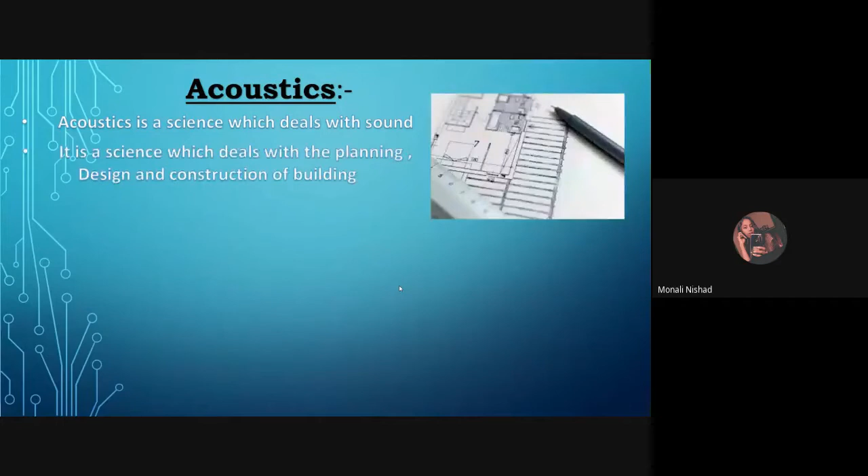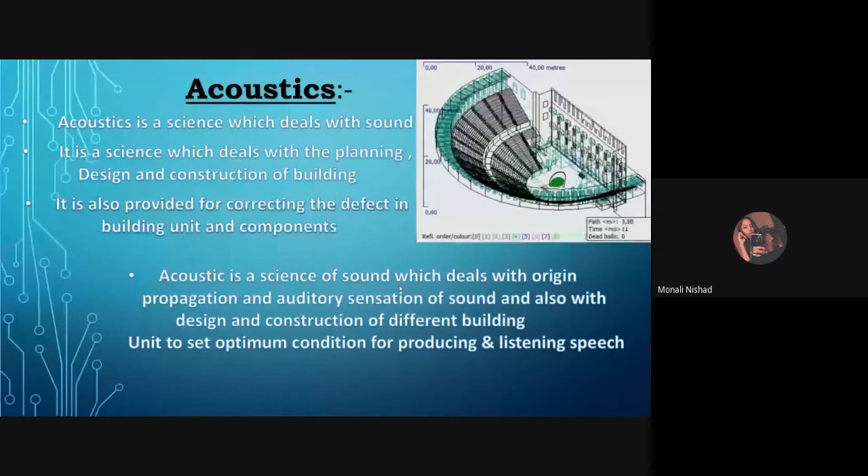To deal with these types of problems, we have a branch of science named acoustics. Acoustic is a science which deals with sound. It is a science which deals with the planning, design, and construction of buildings. It is also provided for correcting the defects in buildings, units, and components. Acoustic is a science of sound which deals with origin, propagation, and auditory sensation of sound, and also with design and construction of different buildings, to set optimum conditions for producing and listening to speech.

Now, we are going to discuss some basic requirements for an acoustically good hall. Just imagine you are attending a music concert inside a hall and at the same time aircrafts creating loud noise are passing outside. Then what do you think, could you really enjoy the music? No, I don't think so.

So our first requirement is site selection. Before construction, the first important factor to be considered is the location for best acoustical quality of the hall. It should be far from railway tracks, industrial areas, airports, and highways, so that the heavy noise of such locations could not affect our event. Through an appropriate orientation, layout, and structural design, the background noise level in the hall should be kept at around 40 to 45 decibels. Now I would like to invite Nishant to explain the next point.

Thank you, Monali. Hi guys, this is Nishant. Now I will explain the topic volume required for an acoustically good hall or auditorium. The volume of the auditorium is decided by the type of program to be conducted there, and also the number of seats to be accommodated. A musical hall requires a large volume, whereas a lecture hall requires a smaller volume.

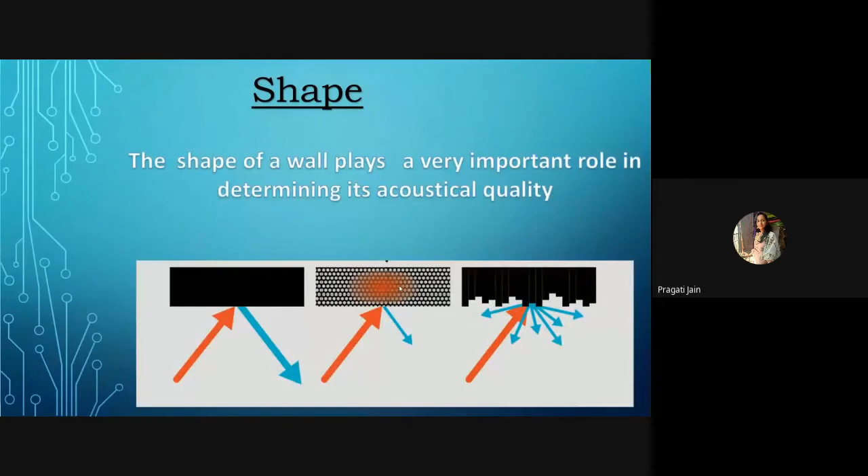The shape of a hall plays a very important role in determining its acoustical quality. As the reflections are created by the roof and the side walls, they should be designed in such a way that echoes are not allowed to generate. In place of parallel walls, splayed side walls are preferred. If there are focusing surfaces on the wall, ceiling, or floor of a hall, they produce concentration of sound into a particular region.

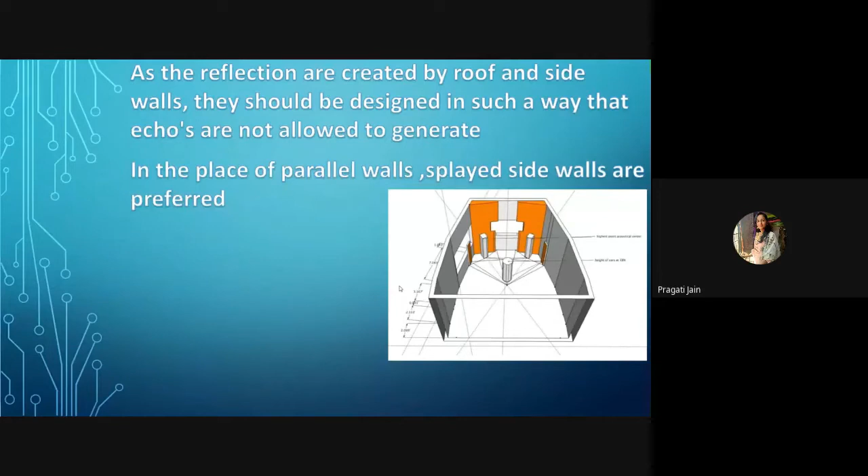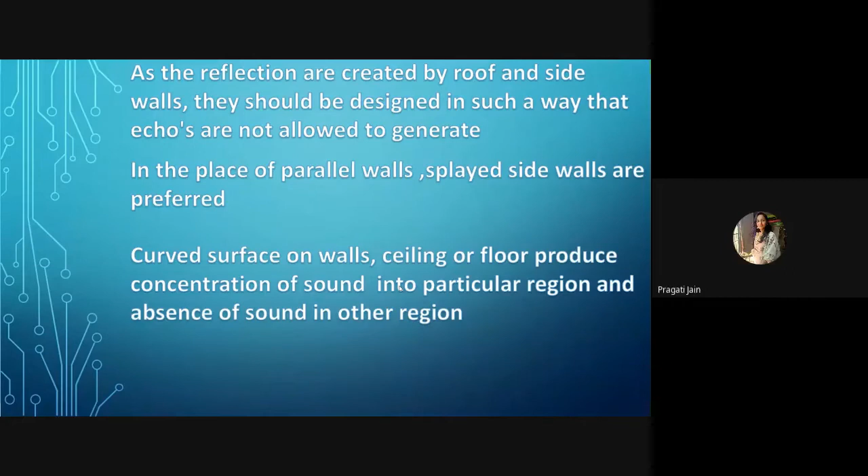As a result, there will be regions of silence or poor audibility. Curved surfaces on the wall, ceiling, or floor produce concentration of sound into a particular region and absence of sound in another region. For uniform distribution of sound, there should be no curved surface. If such surfaces are present, they should be covered with absorbent material. Thank you, so I would like to invite Pranjal for the next topic.

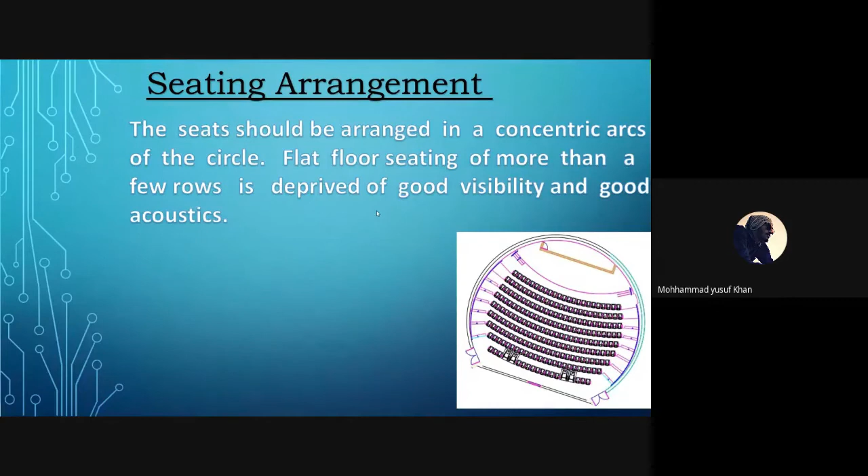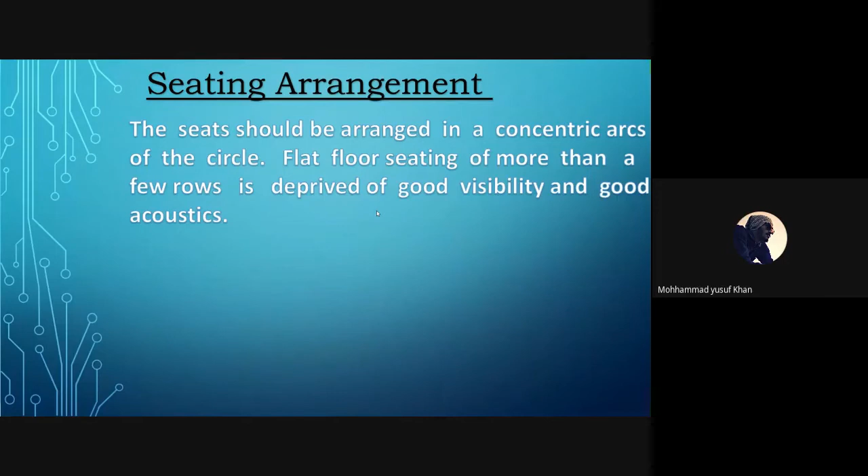Further, the seats in each row should be staggered in relation to those in front, so that the line of sight of a person in any row is not obstructed by the person sitting in front of him. The back-to-back distance of chairs in successive rows should be at least 85 centimeters, and this may be increased up to 106 centimeters for extra comfort.

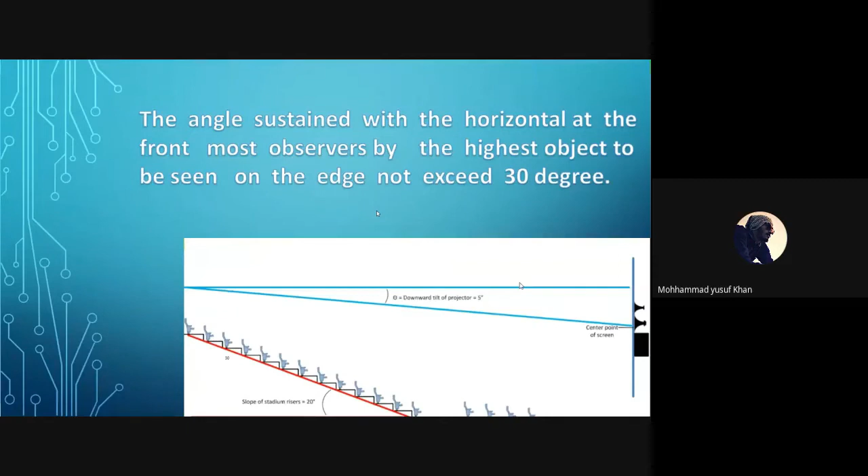The angle subtended with the horizontal at the frontmost observer by the highest object to be seen on the stage should not be more than 30 degrees. The distance of the first row should be about 4.5 meters for movies and 3.6 meters for theaters.

In case of movies, sound with lip movement is most essential, and in case of drama, a person with normal vision should be able to see the facial expression of the performer. To satisfy all these conditions, it is recommended that the distance of the farthest point from the screen line should not be more than 20 meters.

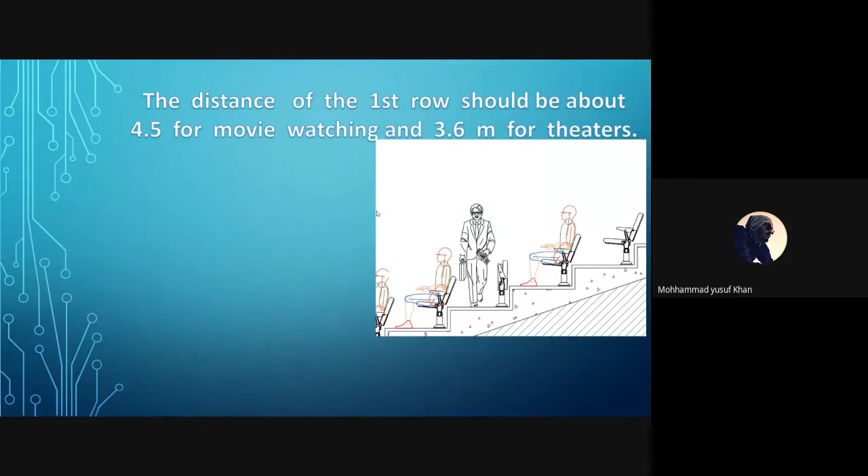Where a balcony is provided, its projection into the hall should not be more than twice the opening height of the balcony. If balconies are too deep, sound shadow is created for the person in the seat below the balcony, who does not receive ceiling reflection, so a suitable sound reflector should be provided to get rid of this defect.

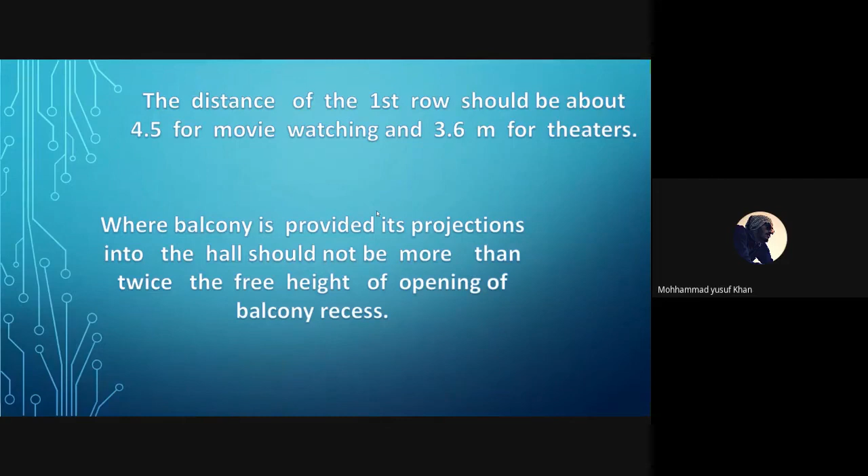The interior surface of the hall should be given utmost attention to make the hall acoustically satisfactory. If the side walls are parallel, they are to be covered with absorbing material for a length of about 7.5 meters from the proscenium end. As reflections from the rear wall are of no use, the rear wall should be covered with absorbent material.

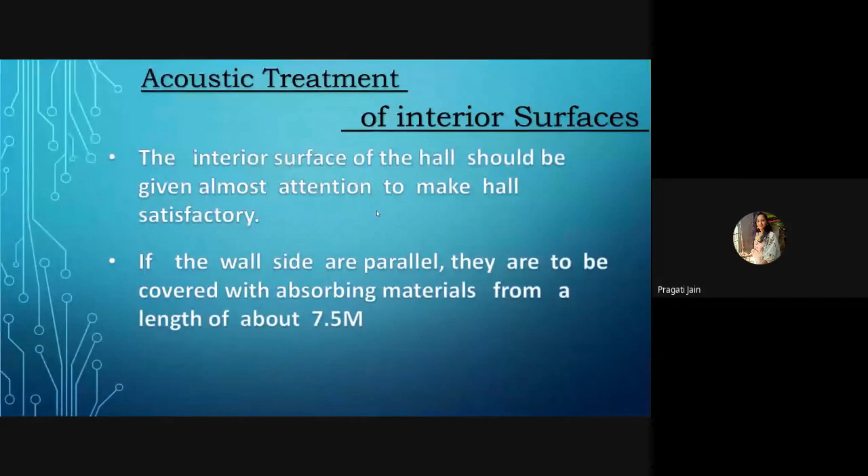In a large hall, a false ceiling is usually provided. The false ceiling portion near the proscenium should be constructed of reflective material and inclined in a proper way to help reflection of sound from the stage reach the rear seats in the hall. Concave shaped ceilings in the form of a dome should be avoided, and the floor should be covered with a carpet.